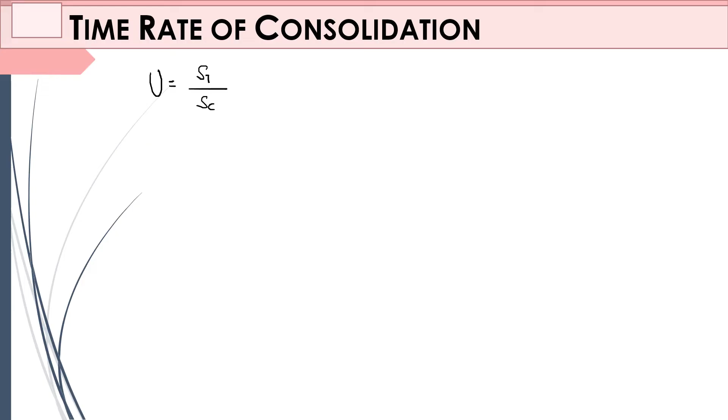So, how can we relate your degree of consolidation with the time rate of consolidation? Wag agad magulat sa formulas. So, we have here your different formulas for your coefficients to be used to get the value of your time rate of consolidation. Actually, itong pinag-uusapan natin na formula is for our time factor, which is your TV. So, TV is called your time factor for your degree of consolidation. So, dito muna tayo. Eyes here muna.

So, the formula for your TV, that is CV times T over HDR squared, where your T is the time rate of consolidation, and your H sub dr is the length of your vertical outflow. So, itong TV is the time factor. So, pag-usapan muna natin paano natin makukuha yung value ng time factor natin if that is not given. For example, we can get the value of your TV and then time yung hinahanap.

Parang vice versa. So, it states that if your degree of consolidation is greater than 0 but less than 60%, take note of that, your TV is equivalent to pi over 4 times u over 100 squared. So, dito, makukuha natin yung value ng TV. But how about if your degree of consolidation is greater than 60%? Therefore, the formula na gagamitin natin is TV is equal to 1.781 minus 0.933 log of 100 minus u. And again, yung u natin is the value for your degree of consolidation.

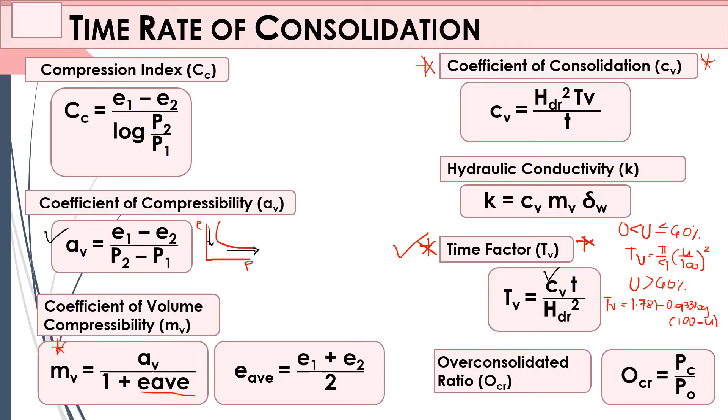Talking about the variables, okay? So, E sub 1 is your void ratio at pressure 1. E sub 2 is your void ratio at P2 or pressure 2. Your K is your coefficient of permeability, yung nakilala nyo during the first topic. And your gamma water. And your T is the time corresponding to the degree of consolidation. And HDR is the thickness of the sample drain.

So, kapag pinag-uusapan natin yung HDR ninyo, dalawang bagay yan. Meron tayong kino-consider na single drain and double drain. So, pag single drain, for example, this is your sand. Kapag single drain, meaning to say, yung outlet ng soil natin or ng tubig natin is iisang side lang. Yung outflow ng tubig natin sa soil is dito lang sa taas. And this is your H.

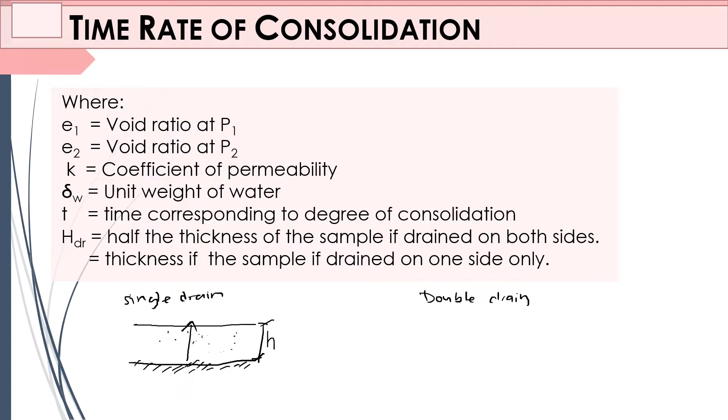Meaning to say, kapag isa lang, baka impermeable layer itong soil na ito. Kaya hindi nagkakaroon ng outflow ng tubig. Therefore, if it is considered as single drain, HDR is equals to H. So, pag sinabi naman natin ngayong double drain, for example, this is your sand, your soil layer. Sabihin natin this is sand and this is sand.

So, kung hahanapin natin yung outlet, you can have your outflow sa baba and your outflow sa taas. Imagine na lang parang sponge, parang si SpongeBob, na kapag isi-squeeze mo siya, both sides nagde-drain yung tubig, from top and bottom. So, parang ganun din yung idea ng double drain. Both sides, meron tayong outflow.

So, saan ba natin hahanapin yung value ng H na ito? Ang H natin is makikita dito. So, kapag double drain tayo, your HDR is equivalent to H over 2, since paghahatian ng top at ng bottom natin yung outflow natin. So, kung nagtataka naman kayo, bakit meron tayong K dito or your coefficient of permeability?

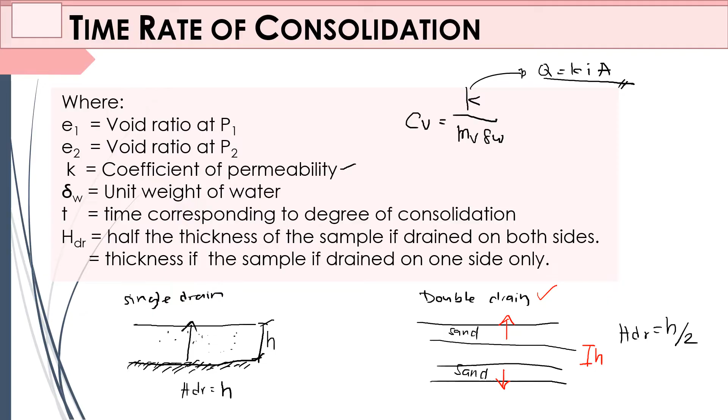Again, your coefficient of permeability will help us to determine your time rate of consolidation because your K will tell us the rate of flow of the water passing through the ground. Okay, sana na-gets yan, everyone.

So, let us talk about your consolidation settlement under foundation. Based on our previous example, meron tayong ganito. Last problem natin for the settlement, yung problem na yun is immediate settlement. Now, we will try the settlement under the foundation for primary consolidation settlement.

Natutunan natin last time kung paano natin kunin yung value ng surcharge. There are some problems where your surcharge or your induced load is given. Ano ba yung surcharge natin? That is your delta P.

So, if the given is a unit weight, para makuha natin yung ating surcharge, walang problema, because that is just the unit weight times the height of the surcharge. So, paano naman if foundation tayo? Dito na pumapasok yung ating prismoidal formula.

So, according to the prismoidal formula, we can get our induced load, or your surcharge load, by using the formula: change of P is equal to the change of pressure at the top of the clay plus 4 times the pressure at the mid layer of the clay plus the change in pressure at the bottom of the clay, divided by 6. And the datum of these pressures is lahat papunta sa clay.

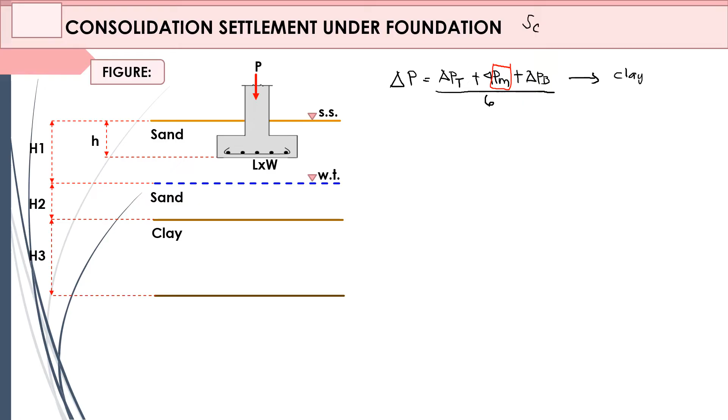But most of the textbooks, kung makikita nyo, ito lang yung kinukuha nila agad, yung PM or yung pressure at the middle of the clay layer. So, sabihin natin this is the diagram. You have your foundation and the base is length times width. Ito yung length, and yung width natin is nandito, hindi nakikita. From the soil surface, the bottom of the foundation can be seen at height h. So, total height is h sub 1. Sand pa rin to. You have here your water table. Under your water table is sand pa rin, and the height is h sub 2. Under the sand layer, you have your clay.

So, normally, ang ginagawa dito is yung mas kilalang 2:1 method. Paano ba natin sinabing 2:1 method? Kung i-project natin pababa yung ating foundation, ganito yung kanyang orientation papunta sa clay natin, where ang slope natin is to be considered as 2:1. Meaning to say, vertical is 2, horizontal is 1. So, mas madali nating makukuha yung length nito kapag i-draw down natin yung length ng ating foundation. Itong length na to, alam natin yung specific length nito. Kung ano yung length natin sa taas, yun yung magiging length natin sa baba.

That is why, in order for us to get the total length of this, kukunin natin kung ilan ba yung length nito. Using the 2:1 method, alam natin that the vertical is 2 and the horizontal is 1. Therefore, this belongs to H2 over 2. This is also h over 2. So, kung kukunin natin yung formula natin at the pressure at the top of the clay, saan ba yung top of the clay natin? Dito, yung top of the clay. So, we know that your stress, okay, wait lang.

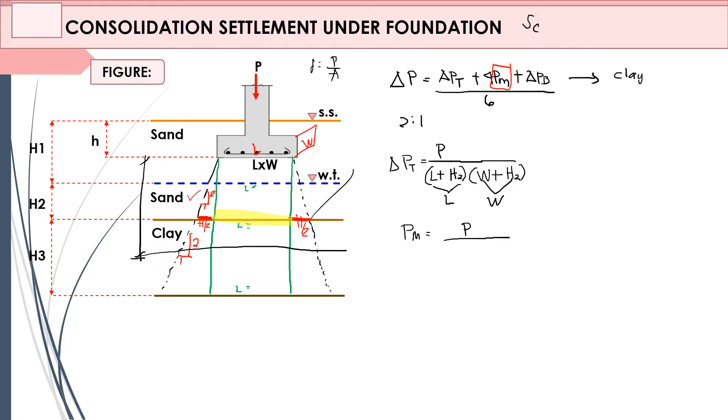Sana naintindihan yon. So, paano naman at the middle of our clay layer? That is P over, hanggang saan na tayo dito? From this point papunta sa middle ng clay layer natin, hanggang dito, yung ating kukunin. So, para mas madali natin siyang maintindihan, let us try to apply this into an example. Kasi mahirap, baka nalilito kayo, puro variables ang nakikita natin. Let us try to have some values in it. So, ito na, the same concept, binigyan ko lang siya ng value.

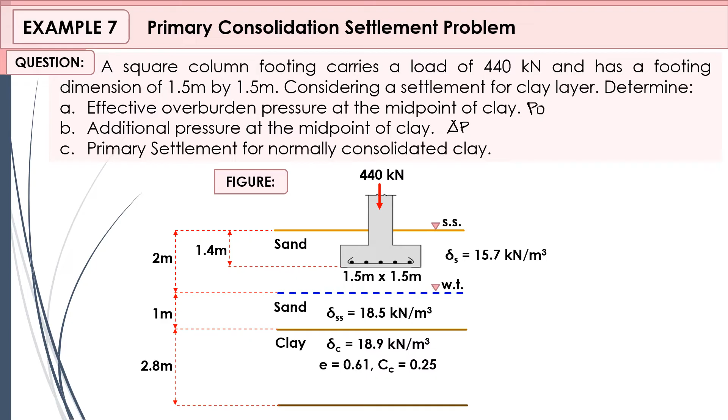A square column footing has a load of 440 kilonewton and has a footing dimension of 1.5 by 1.5. Considering a settlement for the clay layer, determine the overburden pressure at the midpoint of the clay, the additional pressure at the midpoint of the clay, and your primary settlement for normally consolidated clay. Therefore, ang hinahanap natin letter A is your PO. Letter B, hinahanap natin additional pressure, that is your surcharge load. Letter C is for your primary settlement, that is S sub C.

Okay, so let us try to get your overburden pressure muna, given that you have the unit weights. So, unit weight for the dry sand, that is 15.7. Unit weight for the saturated sand, 18.5. And the unit weight for the clay is 18.9. And I think alam niyo na kung paano to kunin.

Again, our effective stress or effective overburden pressure, that is PO, is equal to PT or total pressure minus your pore water pressure, where our datum is hanggang sa mid layer of the clay only. Okay, so dito, sana hindi malito, ang represent ko na dito yung babawasan na natin agad ng 9.81 yung mga saturated soil natin. So given that you have 15.7 times 2, this is for your dry soil. So wala ng pore water pressure. Alam naman natin that pore water pressure at the dry soil is 0. Therefore, your PO is equal to PT.

Plus the saturated sand, that is 18.5 minus 9.81 times 1. Plus the saturated clay, that is 18.9 minus 9.81. Since mid layer of clay lang tayo, that is 2.8 over 2. Again, if nalilito kayo doing this process, you can do the manual calculation where first kukunin nyo muna yung PT, next kukunin nyo yung pore water pressure, and then minus lang to get the effective overburden pressure. Next is to solve for your additional pressure, which is your surcharge.

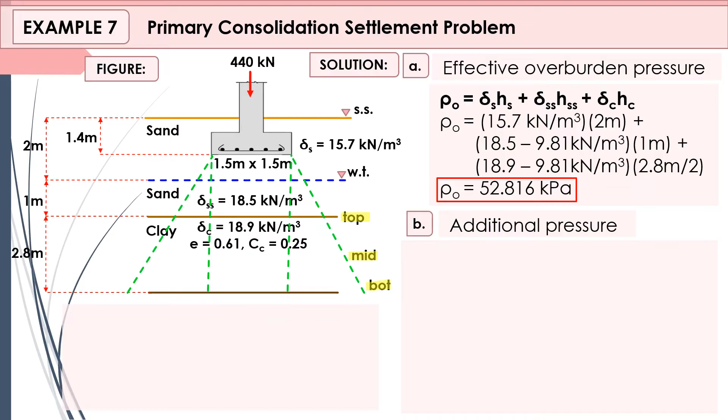And again, this is for our top layer, top of the clay. This is the mid of the clay, and then bottom of the clay. So, isolate natin. Itong green line na ito, nakikita nyo, the length of that is 1.5. And then, extend natin yung distribution ng load natin sa soil. Itong inclined lines natin.

So, the difference in height between the bottom of your foundation papunta sa top layer ng clay natin is 1.6. Make sense? Because yung bottom ng foundation natin can be seen 1.4 meters below the soil surface. So, merong naiwan dito na 0.6. And the height of our saturated sand is 1 meter. So, 0.6 plus 1 is equivalent to 1.6.

Next is the distance from the top layer papunta sa mid layer of your clay, that is 1.4. Paano nakuha ang 1.4? That is 2.8 divided by 2. The next is for the height at the bottom of the clay. This is 2.8. Okay, so let us start to get the top layer muna natin. So that is 440 over 1.5.

Sige, paano natin ito isulat? This is 1.5, plus 1.6. This is 1.6 over 2. This is also 1.6 over 2. Nagets ba? Sige, draw ko na lang muna ulit para mas maintindihan. Itong diagram natin. So, since it is a square column, the length is 1.5. Therefore, its width is also 1.5. So, kung kukunin natin yung area ng footing natin, that is just a squared. As you can see, a squared yung ating formula for that one.

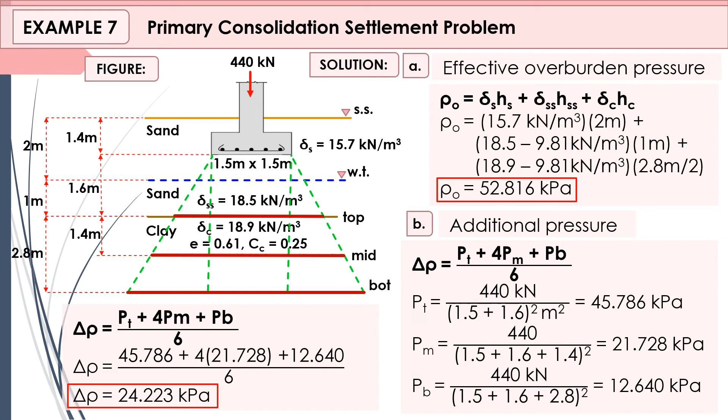Okay, so to get the total surcharge or the additional pressure natin, i-add lang natin, divided by 6 and times 4 sa middle natin. And that is equivalent to 24.223 kilopascal. I hope nagets yan. So, to get our answer for letter C, which is for your primary settlement, you have a formula of Cc H over 1 plus e, log of Po plus delta P over Po.

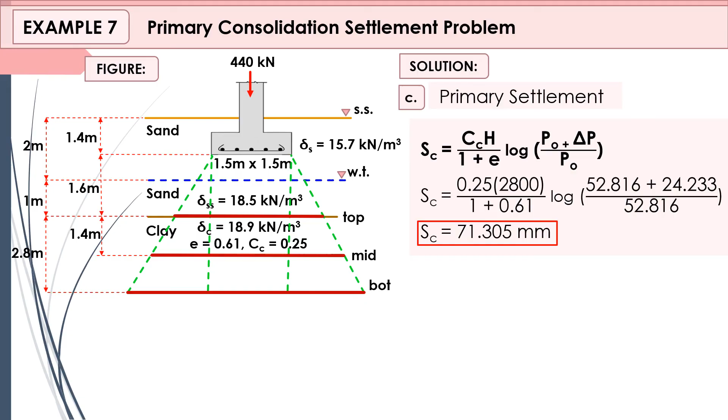And again, this data is from our clay layer. Cc is given, which is 0.25. Our H is the height of our clay, so this is 2,800. Convert meters to millimeters. Over 1 plus 0.61. 0.61 is given, void ratio ng clay layer natin. Times log of 52.816 plus 24.233 over 52.816. And that is equivalent to 71.305 millimeters. And that is your primary settlement for foundation natin. Square footing tayo.

Okay, how about another example? The laboratory consolidation data for an undisturbed clay sample shows e1, e2, P1, and P2. What is asked is to determine the compression index, your void ratio if the pressure is 600 kilopascal, and your coefficient of compressibility. The formula to get your Cc or compression index is the difference between void ratio 1 and void ratio 2 over log of P2 over P1. Easy lang. Pag memorize ang formula, matik 1 point.

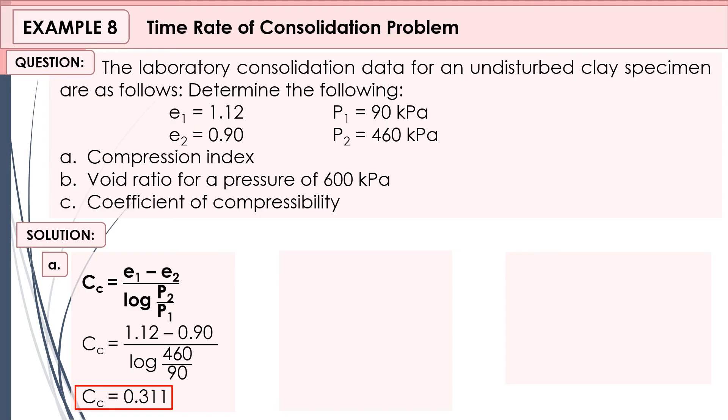Letter B is for your void ratio if the pressure is 600 kilopascal. So, we will use the compression index formula. Disregard na natin yung P sub 2 because we have given another pressure. Hanapin natin yung void ratio when the pressure is 600, and that is equivalent to 0.864. So kung hinanap ngayon is yung void ratio when another pressure is given, e sub 3 na yun.

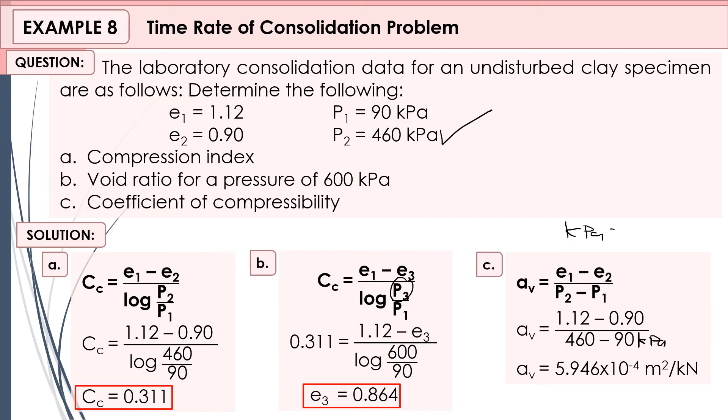Okay, so letter C is for your compressibility coefficient, and that is e1 minus e2 over P2 minus P1. Balik tayo sa given, your P sub 2 is 460. This one is for question letter B lang. So, av is equivalent to 5.946 times 10 raised to negative 4 meters squared over kilonewton. Saan galing yun? Galing yan sa kPa. Since nasa baba yung kPa natin, and voids is unitless, magre-reciprocate talaga yung ating unit. Because we all know that kPa is kilonewton per meter squared. Okay?

How about this one? The same data, I note na pala na change na. E sub 1, you have given the data for your void ratios and for your pressures. Given that the thickness of the clay sample is 25 mm and the degree of consolidation after 2.5 minutes is 50%. So given agad yung TV natin or yung time factor, which is 0.197. But if your CV is not given, your TV is not given, hindi tayo mapre-pressure kasi alam natin kung paano siya kunin. That is when your U is greater than 0 but lesser than or equal to 60%.

Anong yung formula ng TV natin dito? Okay, the formula for your TV for that is pi over 4 times your degree of consolidation over 100 squared. So how about naman if your degree of consolidation is greater than 60? So, another formula, recap ko lang. Nasabi ko na to kanina, that is 1.781 minus 0.933 log of 100 minus U. But since swerte tayo ngayon, binigay yung formula, binigay yung value ng TV.

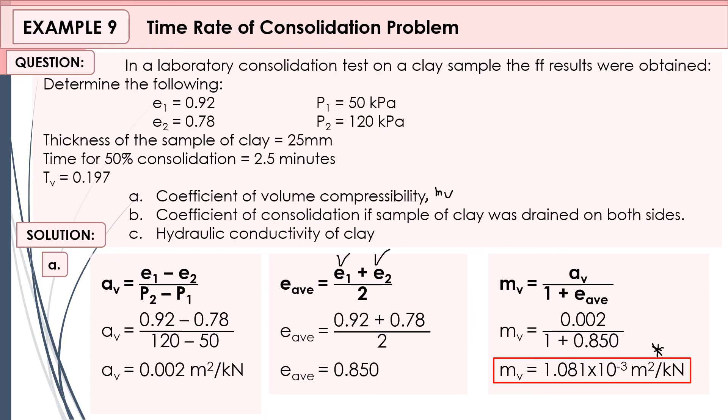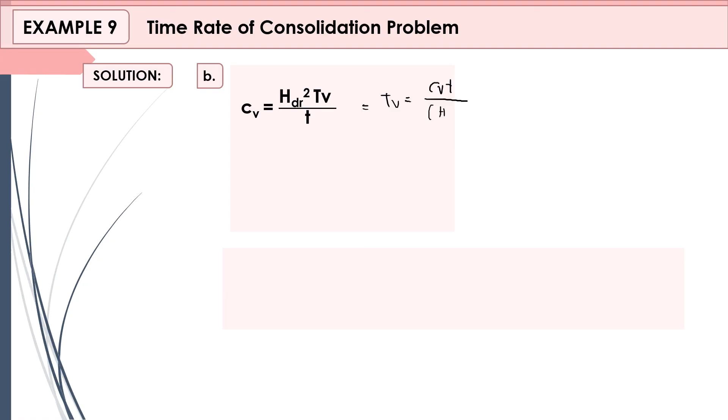Next is to get the coefficient of consolidation if sample of the clay was drained both sides. Both sides daw tayo. Parang yung si SpongeBob SquarePants, isi-squeeze natin siya both sides. So, CV is equals to HDR squared, TV over T, or you can use the time factor formula lang. Shift solve lang natin siya, where TV is equal to CV T over HDR squared. So, pwede pa rin to na formula. Shift solve lang, para hindi nyo na i-memorize tong derived formula na yan.

So, since drained tayo both sides, therefore, your HDR is equivalent to H over 2. Both sides tayo. So, this is your sand. Kapag na-squeeze yan, you have to outflow sa taas at sa baba. Okay, this is our H. So, that is equivalent to 0.025 meters over 2, quantity squared times 0.197 over 2.5 times 60 seconds. So, take note, kinonvert natin to meters, and since this is in minutes, convert natin siya to seconds. 1 minute is equivalent to 60 seconds.

Therefore, the value of our CV is 2.052 times 10 raised to negative 7 meters squared per second. But if hindi naman strict si problem, pwede pa rin naman siguro tong millimeters over minute. But normally kasi kapag CV yung kinukuha natin, the unit is in meters squared per second.